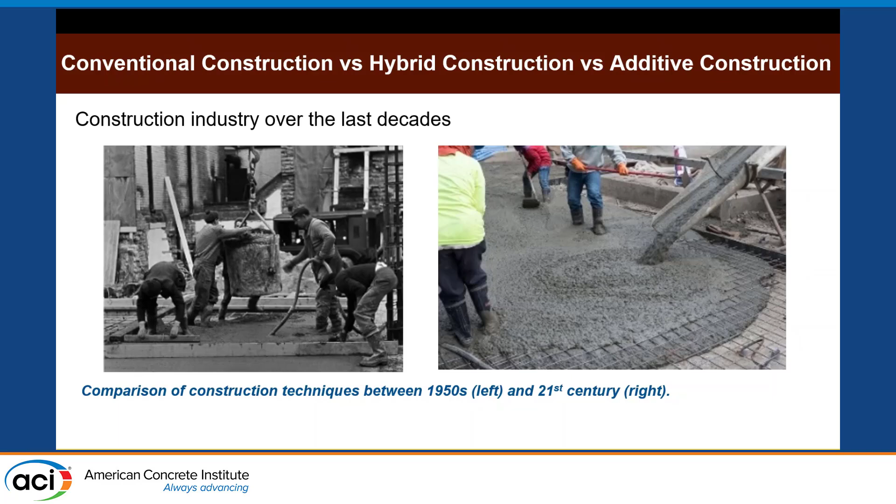So my presentation today will focus on the differences in the technology. We have conventional construction where we form, place reinforcement, and cast. This has been for years. The right side I call hybrid construction, because we print, after we print, place reinforcement, and cast. So I don't call it 100% 3D printing. The last one on this side is where you can actually come up with a larger structure that is optimized, bare material, where you place the material where it's needed.

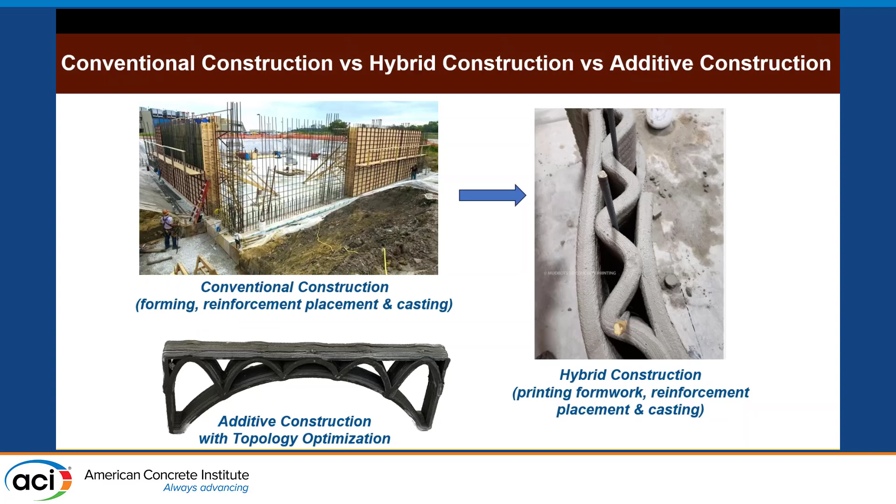So we did this test the last couple of months, and this is very similar to Moini's approach, but for different reasons. I know Reza got his career award in this topic, so congratulations. In one area here, we try to print in different printing paths to see the differences in modulus of rupture for another application. The first one is longitudinal printing, where we have 7 beads and we build up 3 inches. The second one is transverse printing. You can see side-by-side layers. And the third one is iterating between longitudinal and transverse.

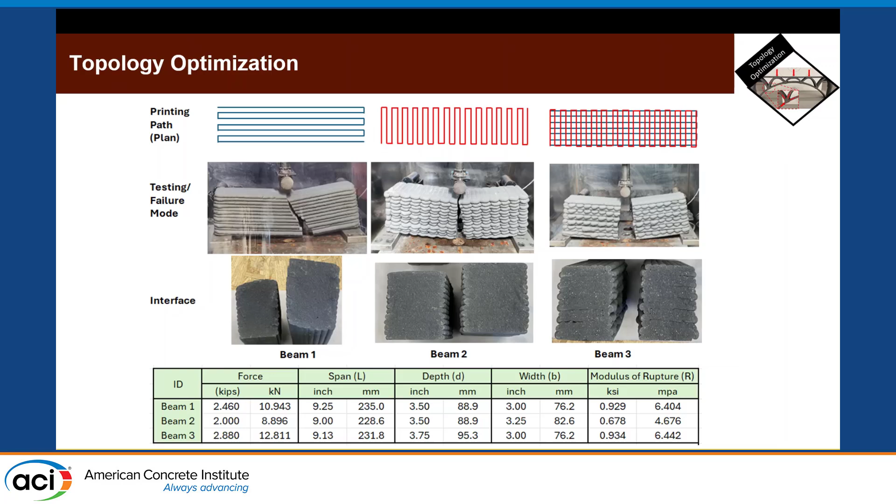If you can see here for beams 1, 2, and 3, we have a very nice fusion between the layers. If you crop the outer layers, you can think it's cast in place in some cases, but in the third one, you still see the layers. My objective here is, if you normalize all the results to get modulus of rupture, our material gets us between 900 to 1,000 PSI as a modulus of rupture.

So one thing we're actually trying to do now is go back to some designs where we can have compression-only structures or optimize the structure based on compression and tension. The first one is an arch that we printed. By material calculation, you can assume the main arch and the horizontal slab are equivalent to just 2 layers of horizontal slab. If you back-calculate from modulus of rupture, you will see that this equivalent beam can carry 135 pounds. When we tested this one, it actually carried 1,349 pounds, which is 10 times, just by varying the printing path.

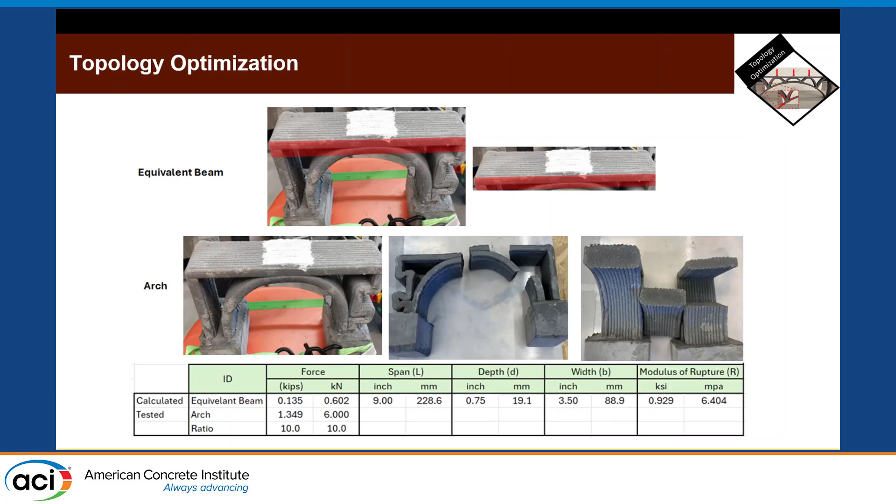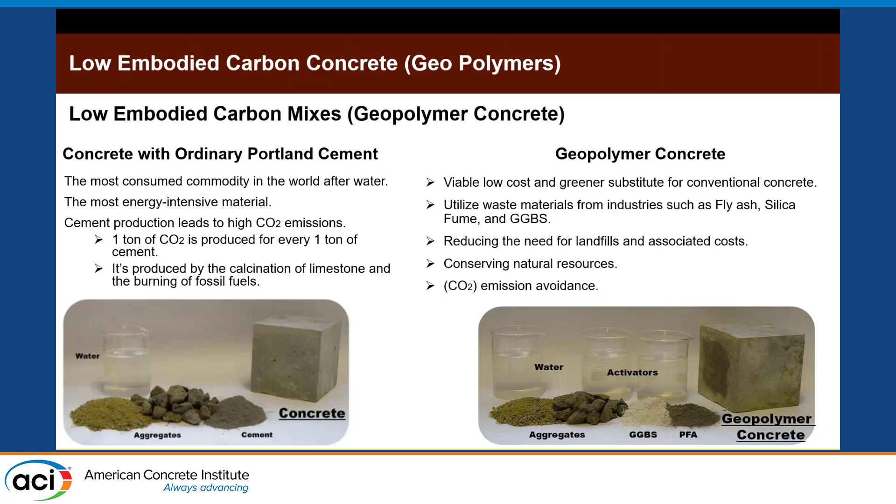We can also use this technology to lower the carbon footprint of our structures. We do a lot of work in the area of low carbon materials. This is one of the in-house mixes that we developed for geopolymer concrete, and this is a cementless material. I think I have a video here that shows the initial printing of this vase. This material is a little bit tricky. The open time is very short, within 10 to 20 minutes. We have the syringe tube in our lab printer, and a couple of those tubes actually shattered during the print because it sets in the syringe tube.

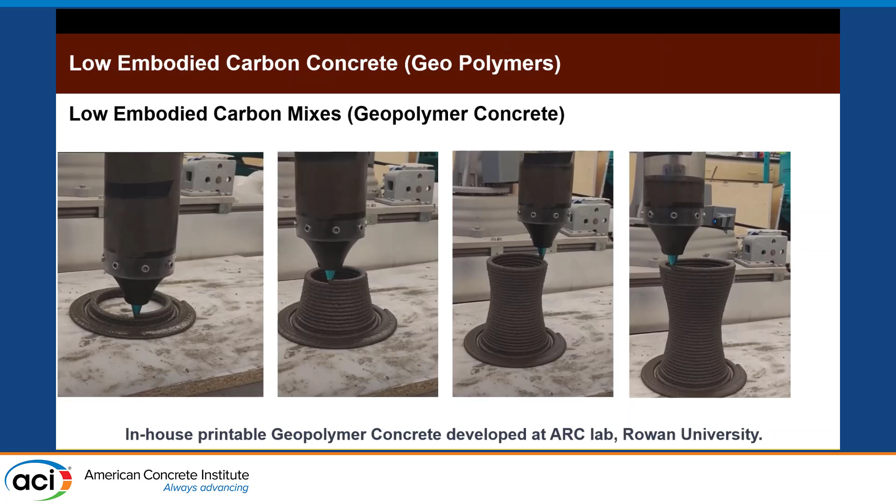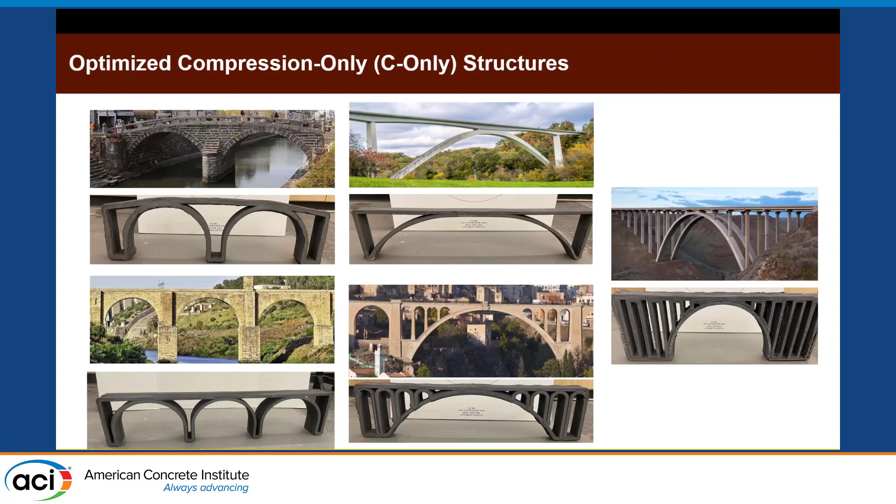We also optimized compression-only structures. This was undergrad research where we asked the student to get designs of compression-only structures with arches from all over the world, and we came up with different designs and were able to print most of them, and we will be testing these very soon to compare them to cast-in-place conventional construction. We scaled that up. Last week we were able to print, because our printer can print a 20 feet by 7 feet by 7 feet volume in one setup. This one is an arch bridge element that we printed with commercial material, and we will be testing those very soon to verify the compression designs that we have.

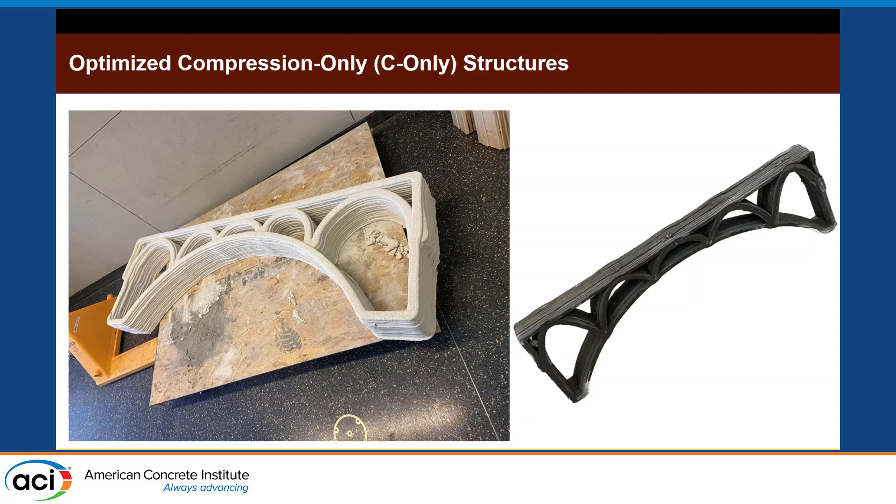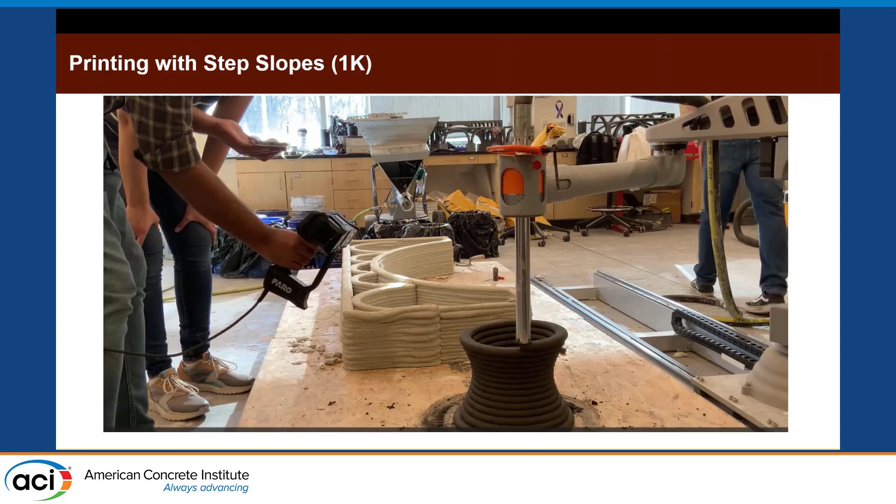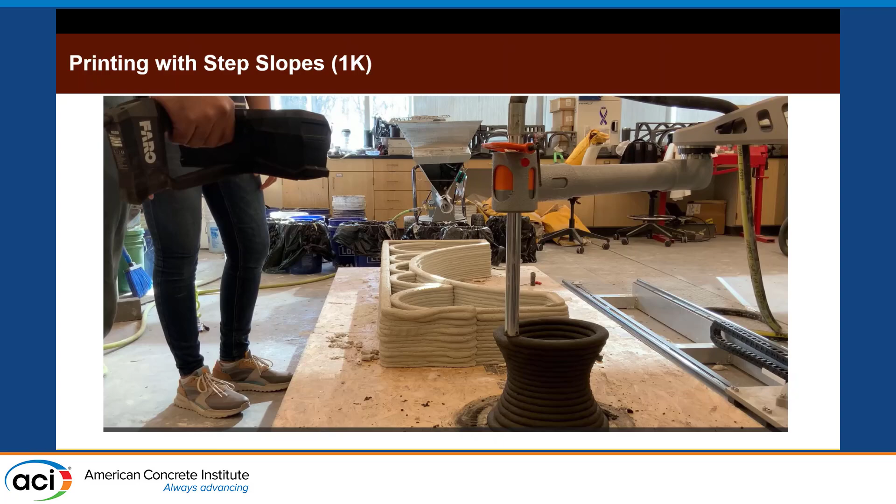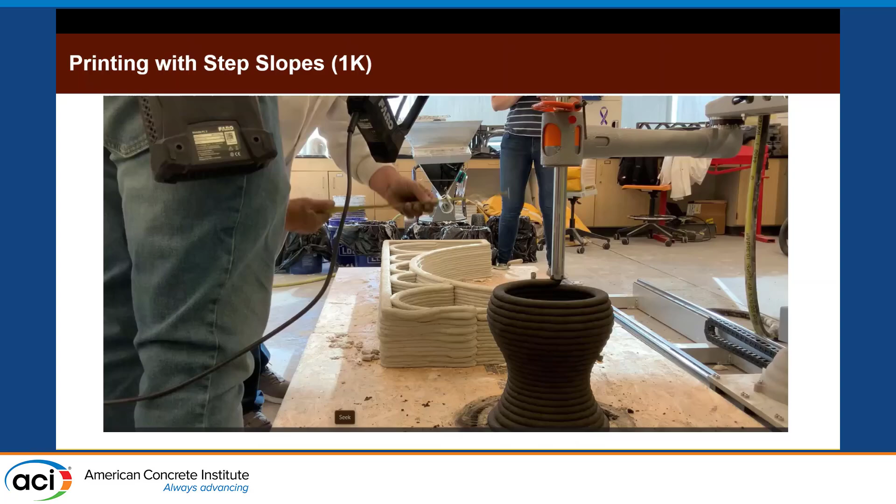This is one material that we developed at Rowan, and this is the printing of it. I accelerated the printing because it is a 20-minute video, but here I slowed it down so you can see the actual speed. This is not a 2K material, so we were able to print at, I think, 20-degree slopes, and this is the actual speed based on our material. This nozzle is a 1-inch nozzle. The one that I showed before was around 6 to 8 millimeter nozzles. And now I continue to print, and this was with the material that we developed. Our material strength can go up to 12 KSI in 28 days. In the back, you can see the other one.

Here is another print that we did with a 2K, two-component material, where we have the accelerant. This is the last slide. The accelerant is added at the nozzle as a second stage, and there is an auger in the nozzle, and this is the actual speed. This technology sets the material or the layer instantaneously, so you can come up with very organic and curved prints.

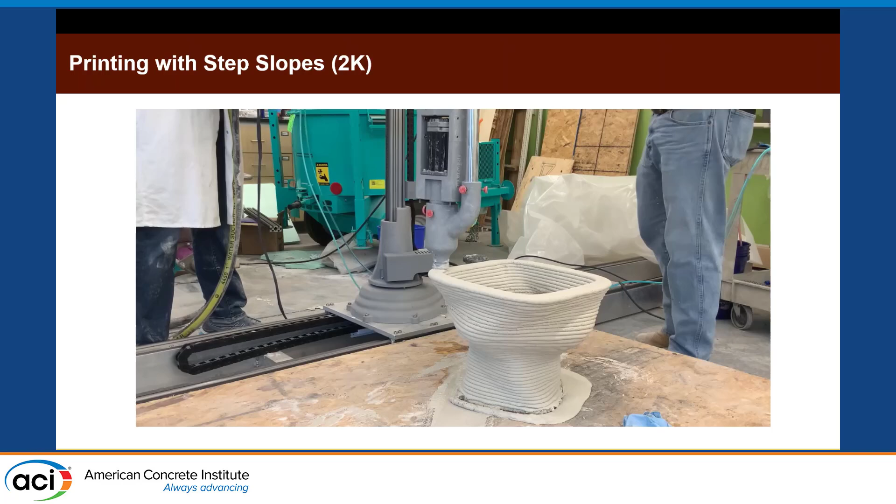And this is the end of my presentation, but as I advocate for this technology, try to think of how to use less material, so less carbon footprint, architectural designs, optimized designs, and multifunctional designs if you need them for this application.